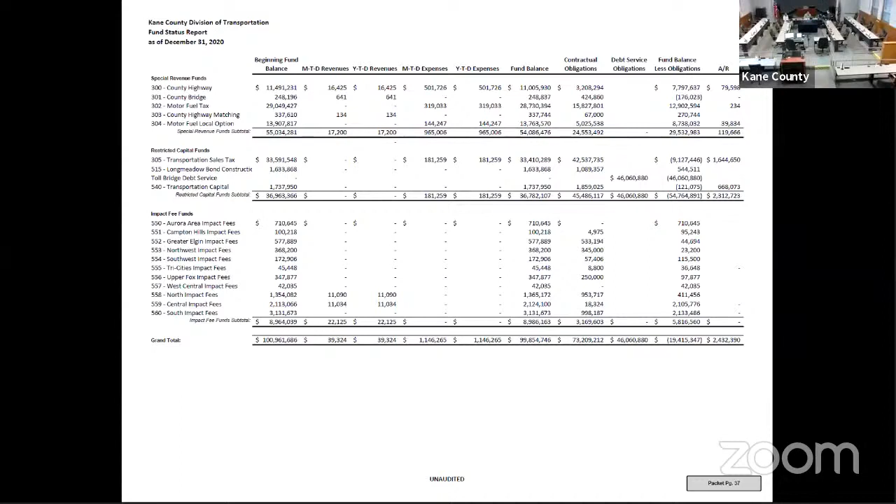Let's move on to item number 5, the maintenance report. As of January 7th, we've been out 9 times with an estimated salt usage of 2,700 tons. We always try to give you an estimate compared to last year. There's currently no concern with the amount of salt on hand, though salt usage due to ice events this year has been a little higher than typical. That's all I have at this point in time.

Moving on to item number 6, the planning and programming report. Back to Tom: the first item is the 2050 long-range plan. We're in the final review of that and have gone through the public comments on the draft plan. We're also working on an interactive web page for the 2050 plan. In your packet, you have a sheet showing the various public comments we've received, and we've received quite a few. Most deal with local issues and aren't really part of our overall county transportation planning, so while no action is needed on most of them, we will be talking to the local agencies regarding some of the comments received.

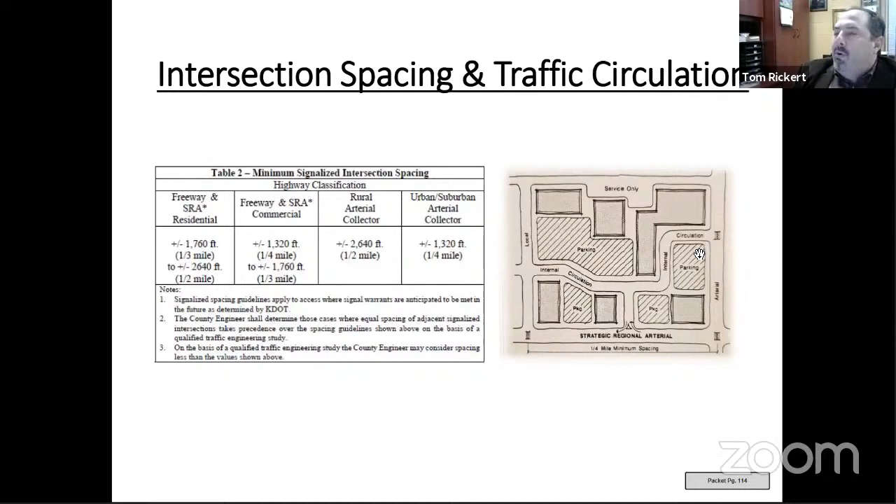Relative to traffic circulation, whenever the county grants access to a freeway or a strategic regional arterial, we try to do our best to make sure that we're meeting the minimum spacing criteria of quarter-mile, and we also try to design it in ways that it safely accommodates, perchance, like a right-in, right-out that you see here on the display. The county board also has a right to be involved in the internal circulation, and so we try to do a lot of planning with all the municipalities up and down the corridor to ensure that that's being looked at appropriately.

In right-in, right-out spacing, there is criteria that is within the access regulations, and again, so that the county is not arbitrary, we really stick to these criteria as best we can. There are circumstances where the county board might have a variance that they grant, but it's usually only if it's generally meeting the criteria of the spacing requirements within the regulations.

When you look at the regulations, you will see that there's a difference between the access corner clearance on the approach to the intersection versus leaving the intersection. We call that upstream and downstream. You can see by this display here that on the upstream, we are much more cautious in how we approach access. On the downstream, there's a little bit more leeway. On the upstream, there tends to be a lot more going on in regards to intersection operations, and also in regards to protecting the safety of the motoring public.

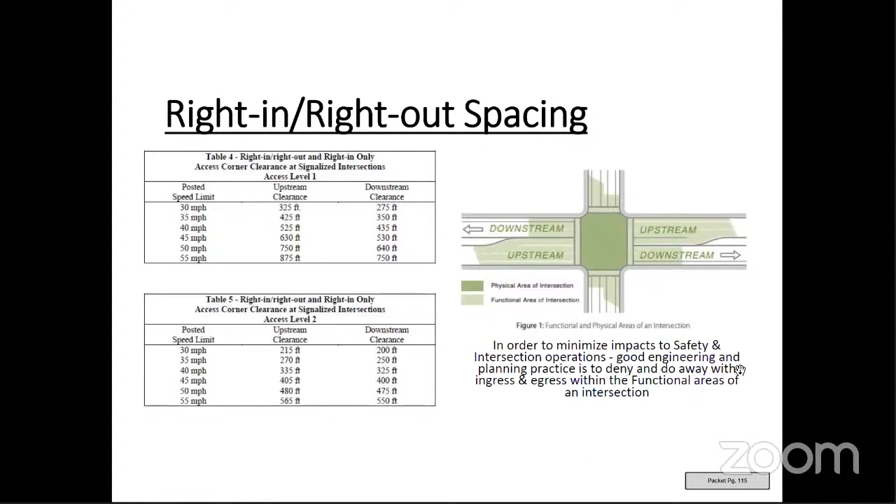We call this upstream, downstream area the functional area of the intersection. In order to minimize impacts to safety and intersection operations, good engineering and planning practice is to deny and do away with ingress and egress within the functional areas of an intersection.

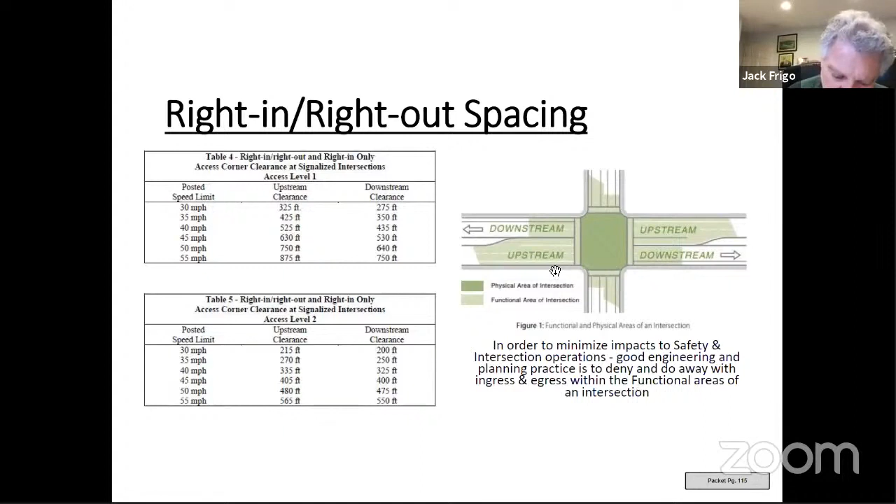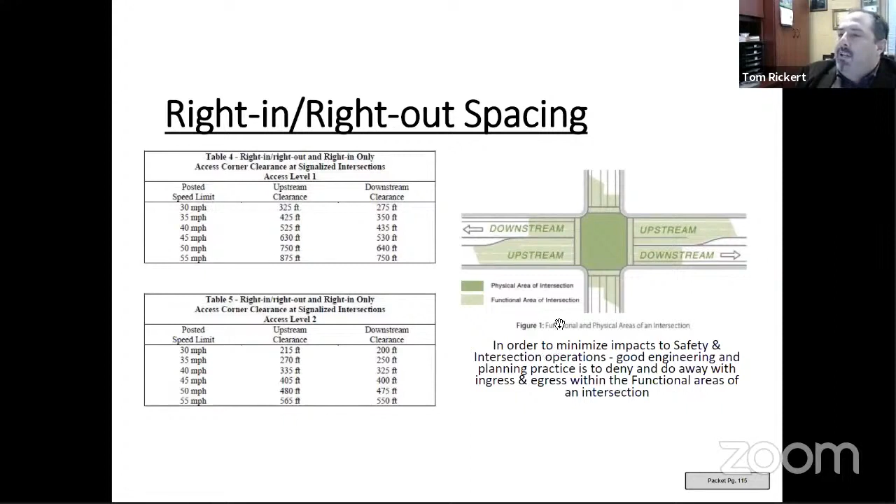There have been some cases where the county board has granted variances to allow a right-in only, as long as there was reasonable separation between the intersection and the upstream approach. So there have been a few cases where variances were granted, but generally the criteria have been strict, and the county board has stuck to them for about 33 years, since the regulations were adopted in 1989 and a few years before that.

Planning and intergovernmental agreements are one of the primary ways that we grant access. Those agreements are usually done ahead of time with the municipalities to make sure that planning documents are in place. You can see on the right here, this map.

This is a map of the various intergovernmental agreements we have in place. Some of those are access related, some are jurisdictional maintenance agreements, or the way we might share maintenance with the municipality, and some are cost sharing agreements. I believe in total we have about 180 intergovernmental agreements where we're working with municipalities on various projects as well as on access control.

A general overview of access policies and IGAs: the IGA typically deals with access control management and intersection spacing, and it almost always points to the access regulations. If you go down Randall Road, Orchard, Kirk, and Fabyan, you will see that the spacing is generally in alignment. The county board has been consistent for over 30 years on the way they approach access.

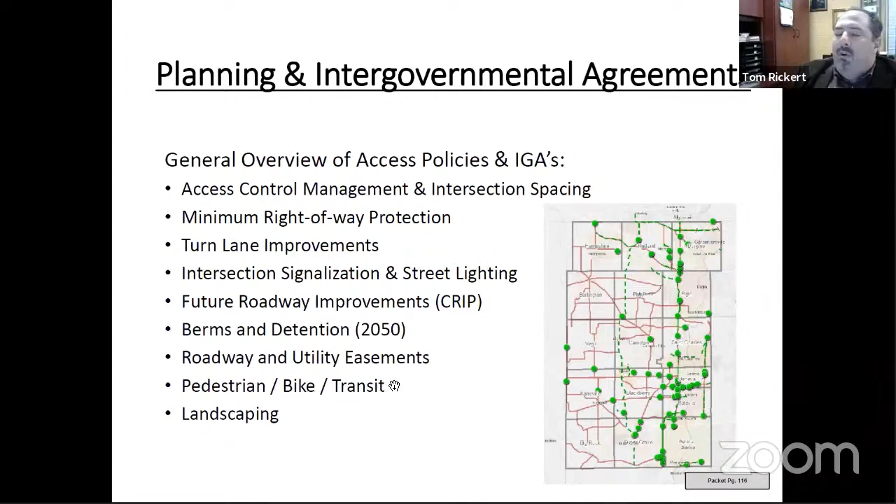There's also setbacks of berms and detentions so that it meets the 2050 requirements of planning. Roadway and utility easements are incorporated for things like sidewalks and various utilities. And then pedestrian, bike, transit is usually dealt with at one level or another, as well as landscaping.

The reason I'm giving this overview is that we generally have a new committee, and I wanted to make sure the committee was aware of our access control regulations, and that staff works directly with those regulations as well as the IGAs that are adopted by the county board. That's how access is dealt with on our freeway system.

The reason I bring all this forward too is because the city of St. Charles has recently requested that the county consider a new access location, and they've asked us to possibly amend the intergovernmental agreement to accommodate that access. So there is a copy of that resolution.

In the intergovernmental agreement we have with the city of St. Charles, the agreement basically said that the county as well as the city would do good planning and good engineering in regards to Randall Road. As part of the planning aspect, this whole area in green, the city and the county came up with a concept in order to adequately address this area for planning.

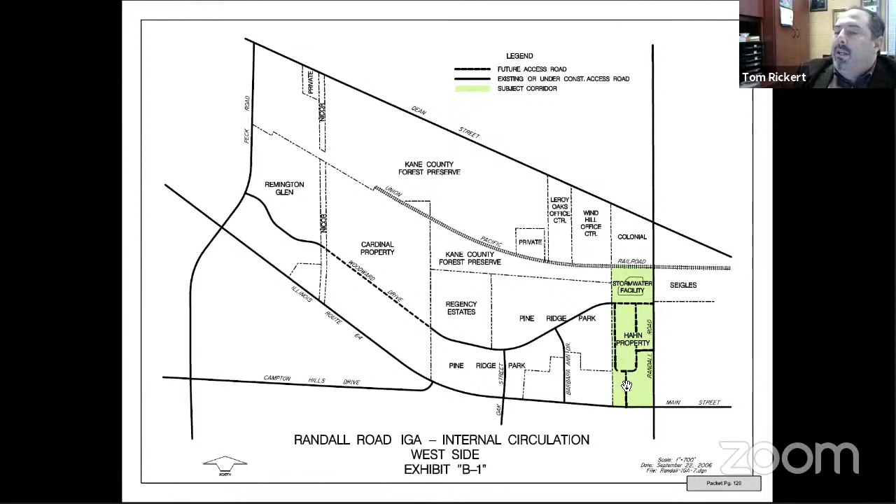We do good planning and try to improve the safety of the existing arterial. Over the decades, we have removed dozens and dozens of existing access points and made sure that the new plans showed good, safe, efficient access points. As part of the planning in the document, there was an agreement between the city and county.

At the north end of this document is Woodward Drive Extended, where there will be a new signal going in the future. There were access easements created so that the three areas of this area could get access to the right in, right out, as well as to Woodward and to Route 64.

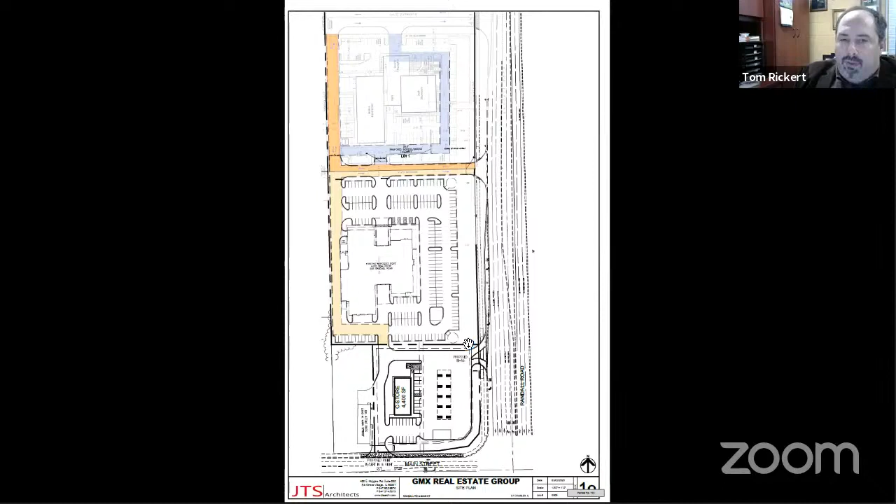So at this point in time, we're looking at the request, the resolution. There's, as the chair mentioned, no determination to be made today. The plan is to evaluate what might be permitted here at this location.

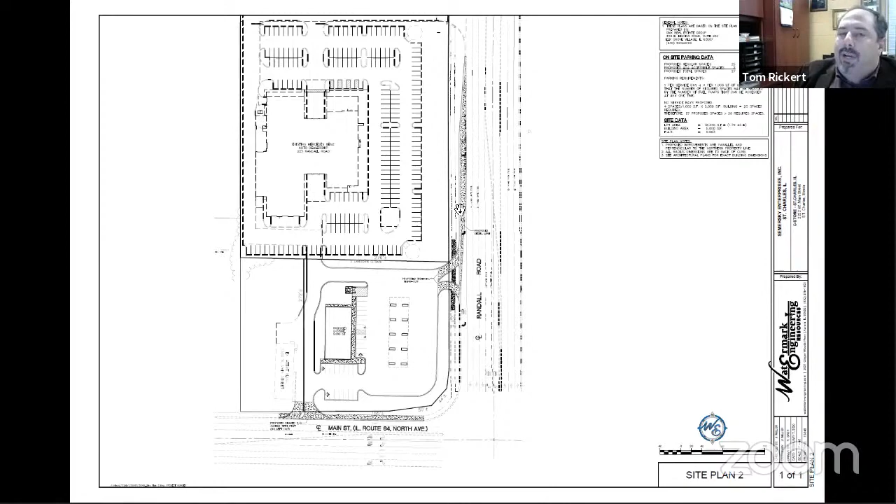There have been reviews by the city's consultant, and HLR reviewed the site traffic study from the developer. In their study under number 3, HLR says there's a minor safety and operational concern with how close the access is to the intersection and conflict with the high volume of southbound traffic movements, the right turn lane and through lane volumes. In number 6, HLR agrees with the conclusions of the developer's traffic study, with a concern of the potential safety and operational issues for the right in, right out access.

This is something we fully concur with HLR on, that this is a safety and operational issue at the staff level. As directed by the county board, we continue to say no to the right in, right out. This has come before the county board and the transportation committee over the last couple decades, and over those couple decades, it has been denied all along, as well as staff has been directed to say no to the right in, right out.

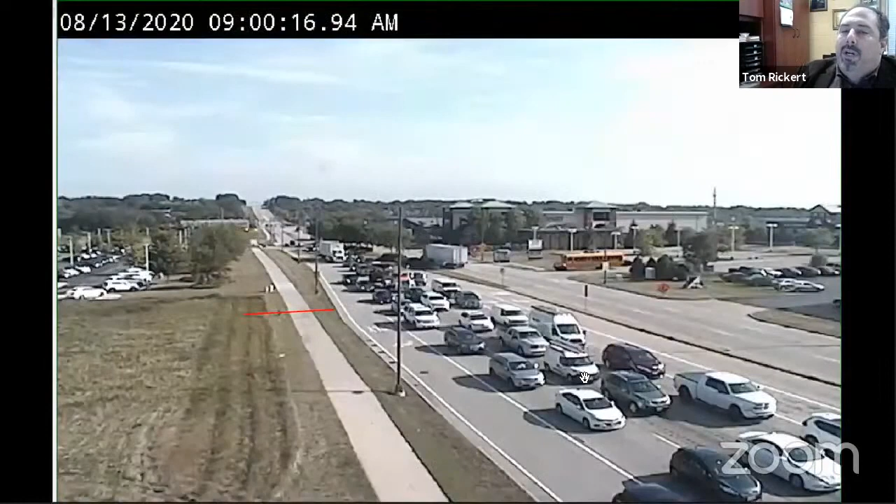You can see operationally that there are backups that occur, and this is again on the upstream, part of the functional area of the intersection. So when the signals during the peak hour back up, you can see the traffic backs up at this intersection, and this red line here is generally where the proposed right in, right out is. So there are some concerns relative to rear end accidents as well as side swipes, that those types of accidents would increase at this location if a right in, right out was approved.

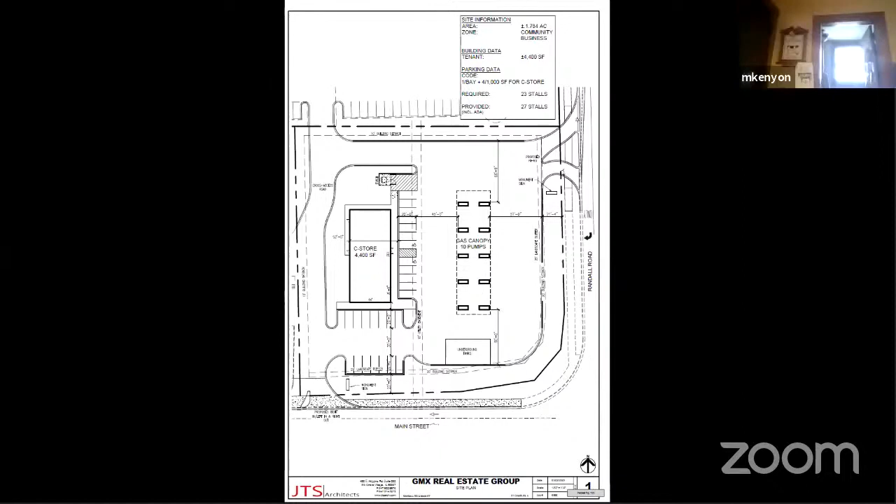This is the site plan, my last slide. Again, they're proposing a right in, right out at this location. For the right out movement here, you're about 225 to 250 feet away from the intersection. We've never allowed a right in, right out this close to an intersection in the 33 years I've worked here, as well as since the access regulations were adopted by the county board. As such, we continue to say no to this.

There have been discussions that the city staff has brought up to us about the possibility of a right in only at this location. This is something staff is going to be evaluating over the next month or two, the possibility of a right in only at this location with the removal of the right out, no right out.

This would be a variance to the county regulations, but it is something that we're looking at potentially coming back to the Transportation Committee with comments. In order to do a right in, we've done this where the county board has granted variances for a right in only, but we've also created some throat length in order to allow a couple vehicles to get into the site and allow for that movement.

You could potentially put in a barrier here and allow for the right in movement to come in at this location. We've done this at a number of locations to allow for some easy ingress off of Randall Road, because a right in only could create rear-end accidents as a car turns in here, or two cars, and operationally it stops in the right turn lane here. So you could have some rear-end accidents, and we want to make sure to minimize that through the design.

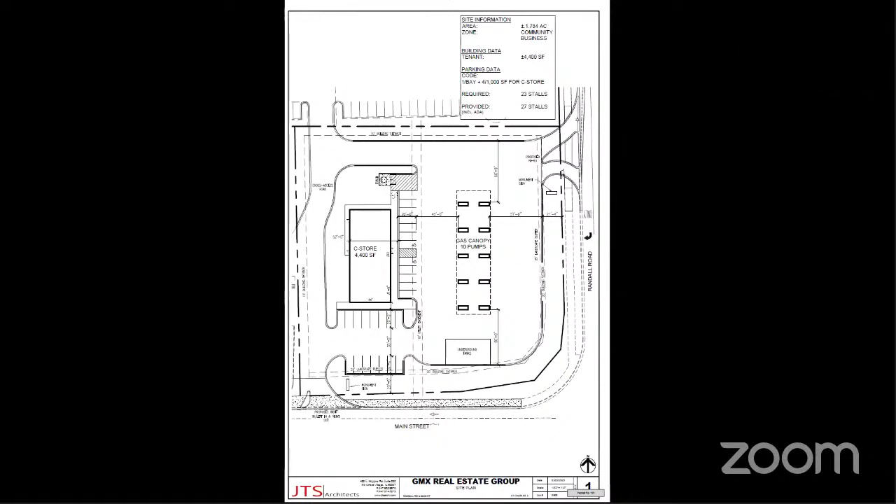Mr. Shepro, go ahead. Tom, or Drew for that matter, are there any actual criteria that are used for determining whether or not a variance is given? Tom, will you take that? Yeah, I think that like criteria that are part of the regulations, no, there's no criteria within the regulations.

There are situations where, you know, the primary concern is the functional area of the intersection, and with the right in at this location, this would be the least amount that we've granted since the access regulations were established by the county board. But it is something potentially that if we designed it correctly, there might be a consideration by, again, the county board for the access.

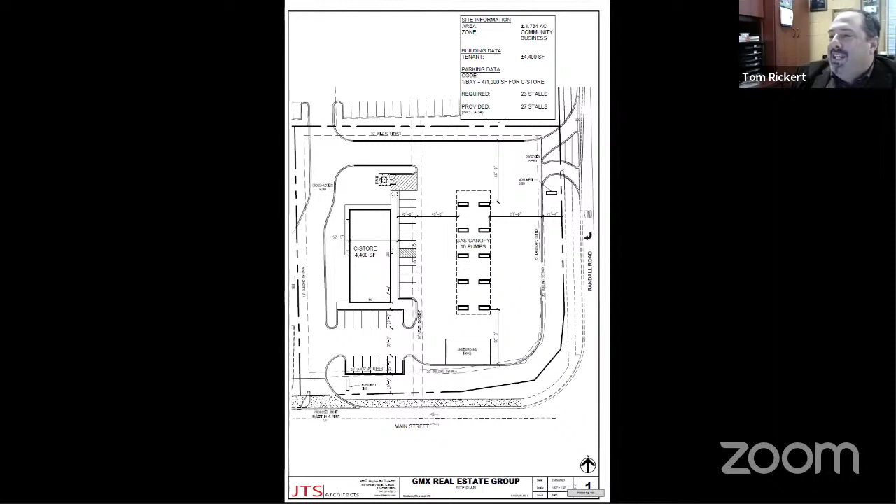We try to do our best to look at the internal circulation, but we will always look at safety first and try to do our best to make a recommendation. I know that doesn't exactly answer your question, because there are no criteria. We're supposed to discourage it. Actually, it does, but the resolution that was submitted by the city...

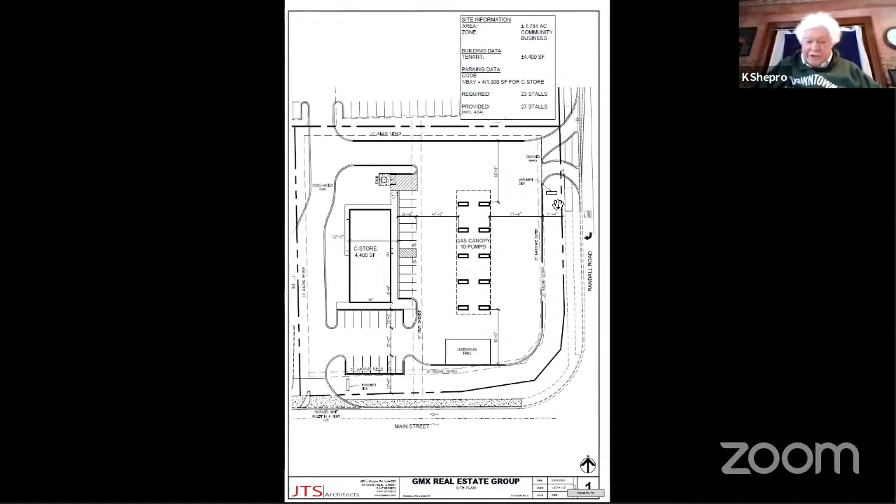Was there any supporting documentation or submittal as to why the variance should be granted? As I read it, it just says they'd like it. Yeah, their traffic engineer is participating. He's going to give public comment, but there was...

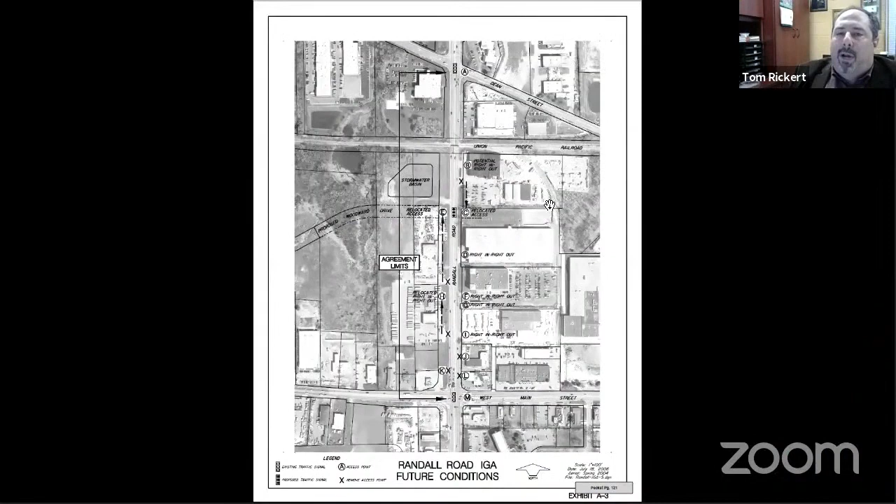Documentation in the traffic study they submitted where they talked about the various access points within this intersection area. We took a look at that documentation, and our feeling was that the existing drives in this area that they were pointing to as part of their decision why it should be allowed, we weren't really compelled by their traffic study, because most of the access points they were looking at were on the outbound aspects of the intersection, or they were on Route 64. Route 64, the county board has no oversight of. It's an IDOT route, as well as the speed limit is lower than Randall Road.

I think it's 35 miles per hour posted on Route 64. So we weren't really compelled. Most of the access points that they were looking at in the traffic study, again, were on the outbound, and our primary concern is on the inbound portion of the intersection because of the way you see traffic backs up at a signal. Were the existing points grandfathered, or would they predate the regulations?

The existing access points that you see here were prior to the regulations. Most of these were put in in the 1960s, probably late 1960s. We've done our best at the staff level over the last 30, 35 years to remove or relocate some of these, and we've done quite a few. The 7-Eleven gas station here used to have 4 access points right on the corner, and we were able, as part of the Randall Road improvements, to move the access points further away.

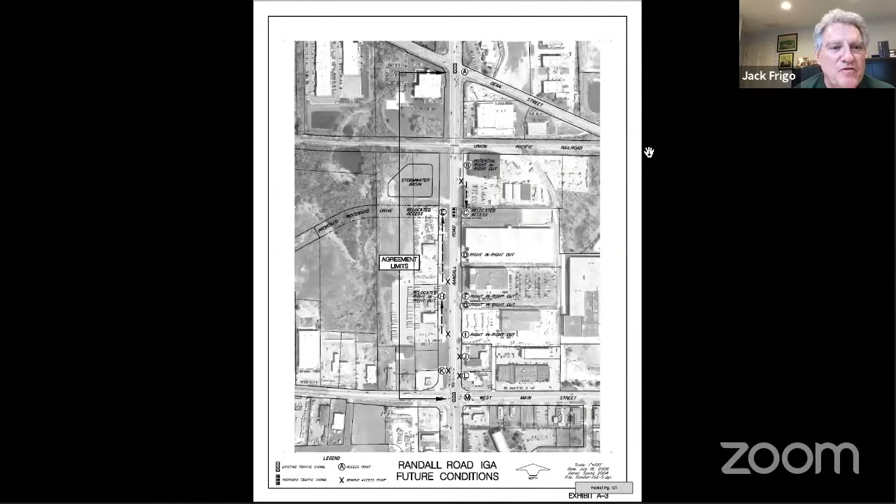Thanks much. I'm a real estate consultant to Samirsky Enterprises. Samirsky is the developer of the Audi Exchange, which is contiguous and just north of the Mercedes-Benz dealership. We purchased about 26 acres at the northwest quadrant about 5 years ago, and this 1.79 acre piece is one of those parcels. As we've looked at the site, the Audi Exchange, which Tom referenced, is under construction right now, just north of Mercedes. Woodward Drive will be extended from its current terminus all the way to Randall Road with a traffic signal there. One commissioner mentioned cars speeding up as they head southbound downhill on Randall Road, and there will be a traffic light at Woodward Drive, so I think that will slow southbound traffic. Tom, if you'd put the aerial back up showing the entire intersection, that would be great.

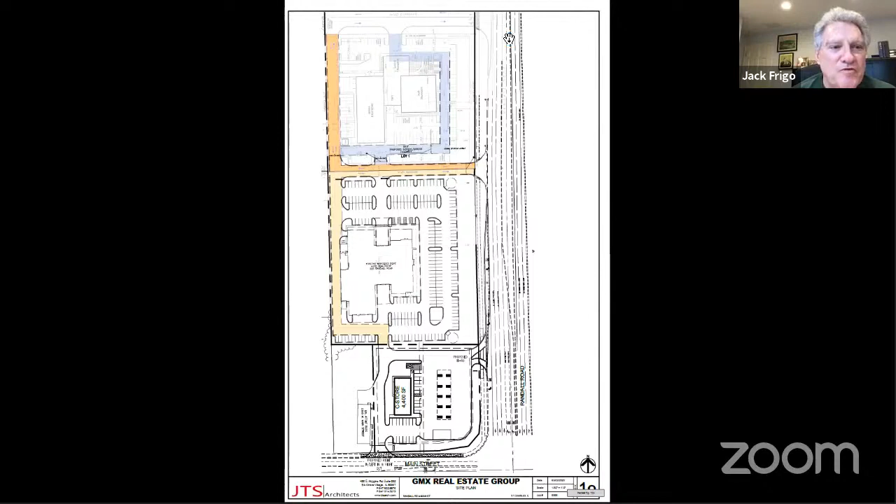So we have marketed this property, 1.79 acres, to numerous other parties. And the obstacle has always been the right-in, right-out access, the limited access. Restaurants or combinations of restaurants and other auto-related uses have all declined the property as a result of limited access on Randall Road.

We have been working with GMX Real Estate Group and their client, Thornton's. The property is currently under contract to GMX, and it's conditioned upon obtaining a right-in, right-out for the site. If we get a right-in only, they can't make it work. It's not feasible for them.

So we're seeking relief for this to obtain a right-in, right-out, and we think if any site would warrant it, this is an important site to get that consideration. As we understand the regulations, and as Tom and Kurt have explained to us over the couple of years, the regulations probably wouldn't permit development on any of the other three quadrants, given the existing conditions. None of those quadrants would likely be developed, or certainly not as they are right now. We have some exhibits we'd like to submit to the committee, and we'll follow whatever the appropriate protocol is through Tom or through the chairman to get those to you for consideration. When we have a chance to speak to you again, we will.

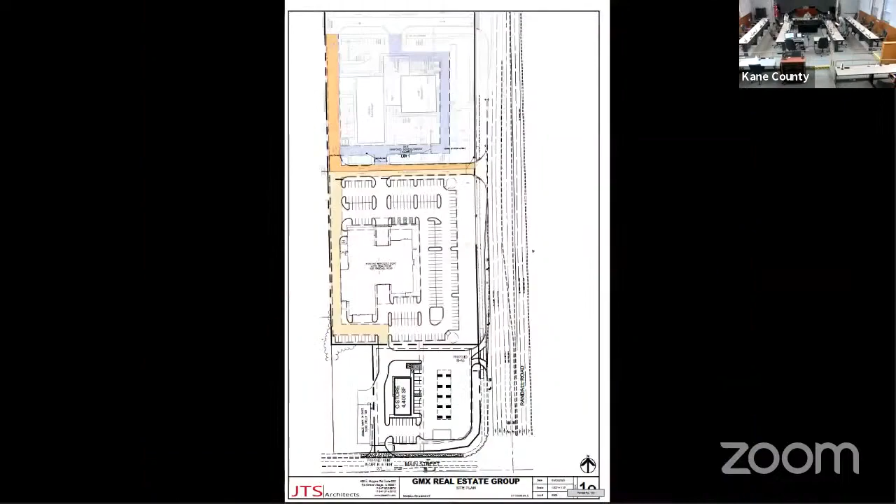Thank you, Chairman. The IMP report, as I like to call it, shows our recently completed construction projects or active construction projects. There's a handful of projects shown on the construction stage. The multi-page document shows, in alphabetical order, our projects in phase 1 or phase 2 engineering, called design highlights. Many of the more high-profile projects have their own project-specific websites with links included in the report. Feel free to give me a call or an email if you have questions our websites don't answer, or if you have questions regarding projects that don't have a website.

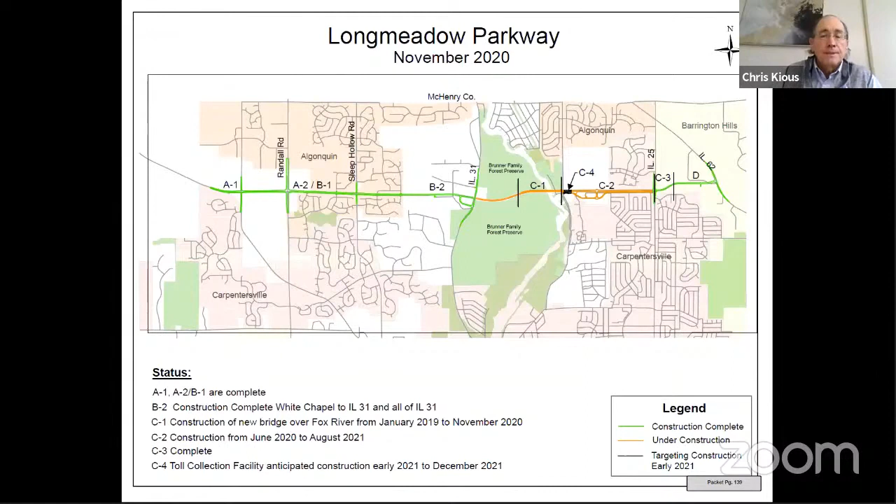Additional comments? Hearing none, we'll do a roll call vote. Berman, yes. Iqbal, yes. Kenyon. Kious, no. Kopi, yes. Martin, yes. Warnicki, yes. Okay, the motion passes.

Steve, did you have anything back on the imp report, or do we continue moving down the line here? Continue moving down, thank you.

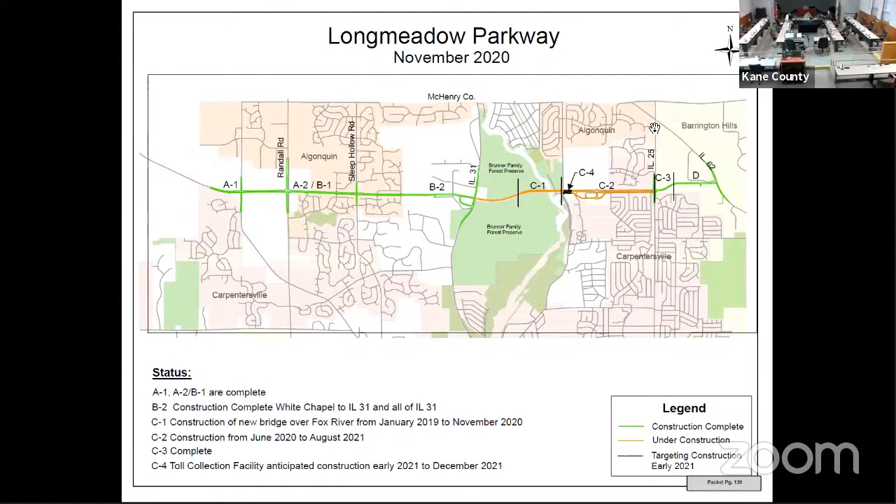Okay, next I'll take a motion and a second to place our various reports we've heard today on file. Berman moves. Moved by Mr. Berman, second by Kious.

Roll call. Berman, yes. Iqbal, yes. Kenyon, yes. Kious, yes. Kopi, yes. Martin, yes. Warnicki, yes. Okay, the reports are placed on file.

We do have need to go into executive session to discuss a personnel issue. So I'll ask for a motion and a second to go into executive session. I move for executive, Berman.

Mr. Berman moves, second by Iqbal. Roll call. Berman, yes. Iqbal, yes. Kenyon, yes. Kious, yes. Kopi, yes. Martin, yes. Warnicki, yes. Okay, give us a few minutes here to move into executive session.

Okay, we're back in open session. And I assume everybody is back. It looks like we are.